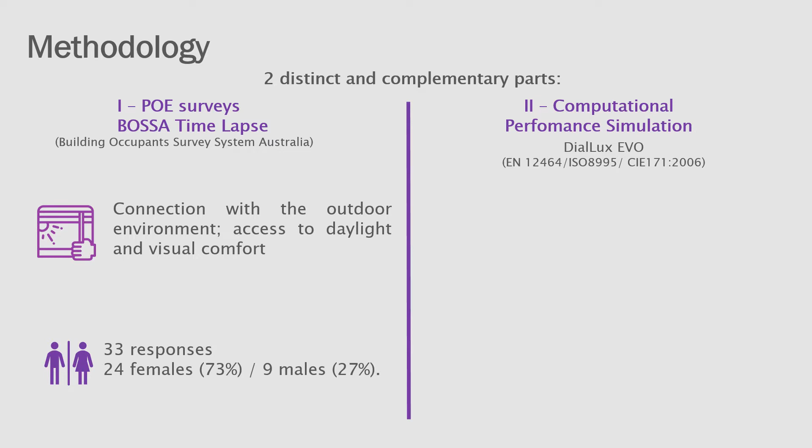This study has two distinct and complementary parts. First is the deployment of post-occupancy evaluation surveys to better understand occupant satisfaction using the Australian tool named BOSSA Time-Lapse. And second is the computational performance simulation using DIALux evo. For BOSSA Time-Lapse, results only from questions regarding the connection with the outdoor environment, access to daylight, and visual comfort are reported. BOSSA collected 33 responses from all workspaces analyzed.

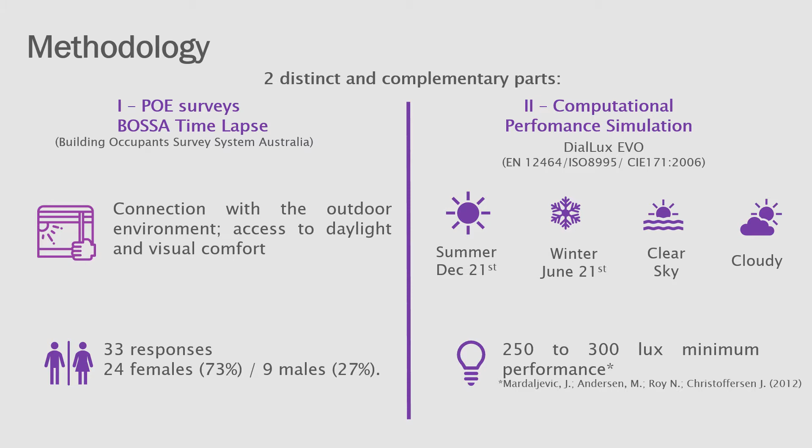Simulations were performed for summer and winter solstices. Clear and cloudy sky conditions were also considered. The range of 250 to 300 lux was used as the minimal performance criteria for lighting levels. FAU-USP was designed by the architects Vilanova Artigas and Carlos Cascaldi in the 60s. The Brazilian modern architecture had a remarkable development in the 20th century.

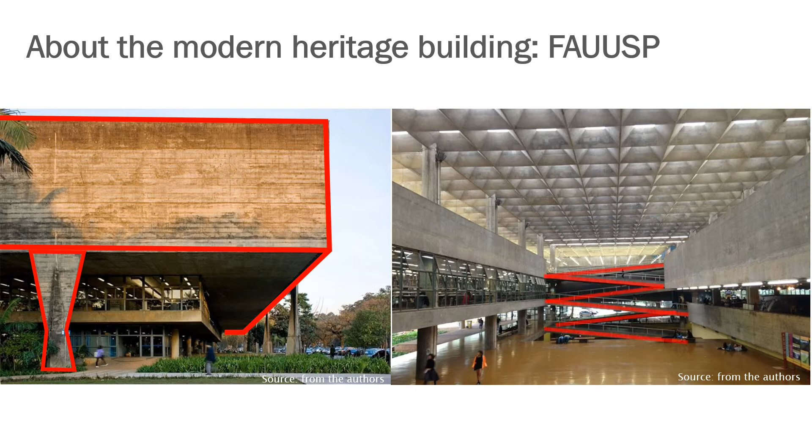As part of his practice and main concept, Artigas also implemented passive environmental strategies to his project. The use of floor-to-ceiling glass windows allowed the access to natural light and outside views, while an extended concrete slab works as a horizontal shading along 2 main facades, protecting indoor spaces from direct solar radiation.

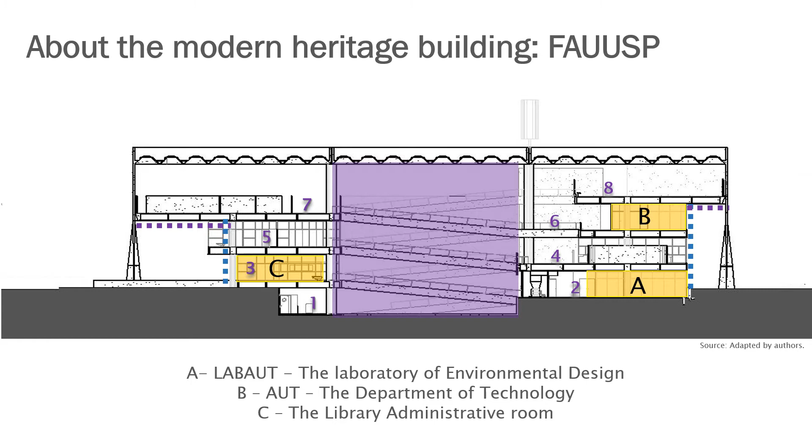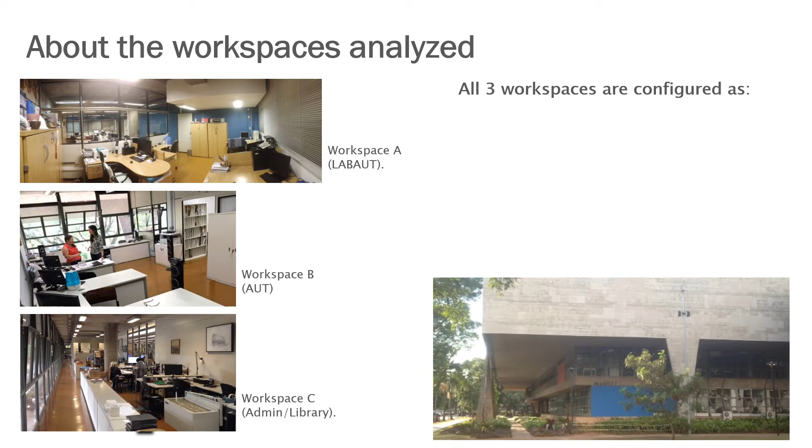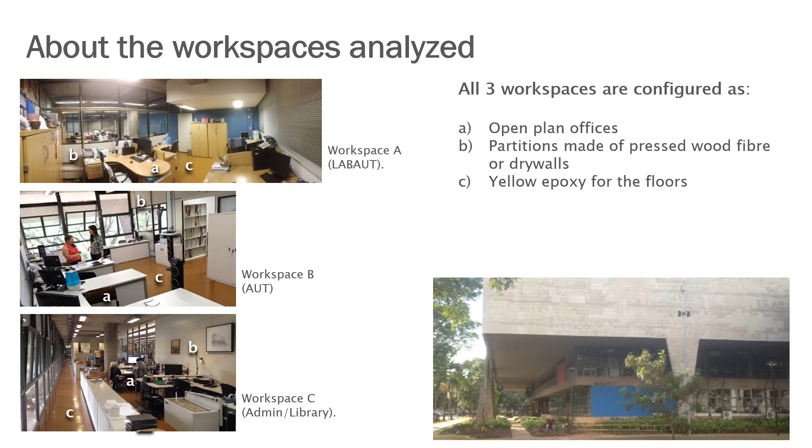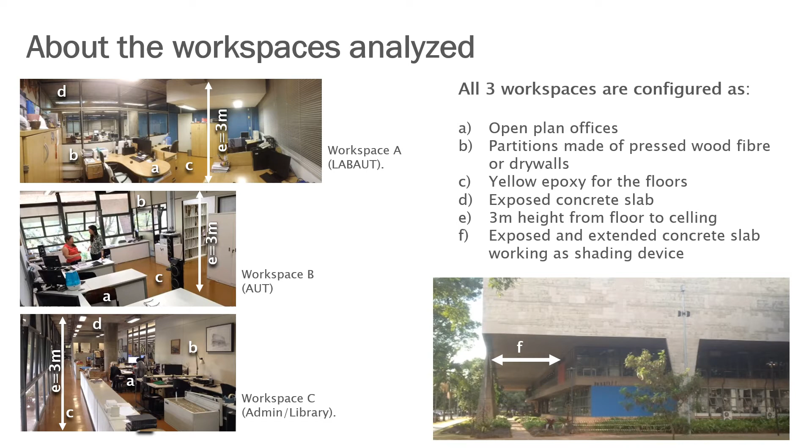The 3 yellow boxes highlight the workspaces analyzed for this study, named here as Workspace A, B, and C. The plans allow us to identify each workspace analyzed in different orientations and floors of the building. The 3 workspaces have similar configurations and are configured as open plan offices, partitions made of pressed wood fiber or dry walls, yellow epoxy for the floors, an exposed concrete slab, 3 meters height from floor to ceiling, and an exposed and extended concrete slab working as shading device. Both the exposed concrete slab and yellow epoxy flooring designed by Artigas are protected from any modification.

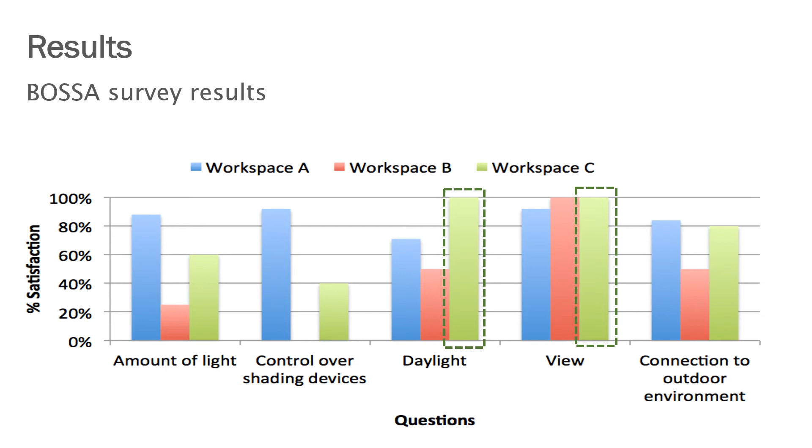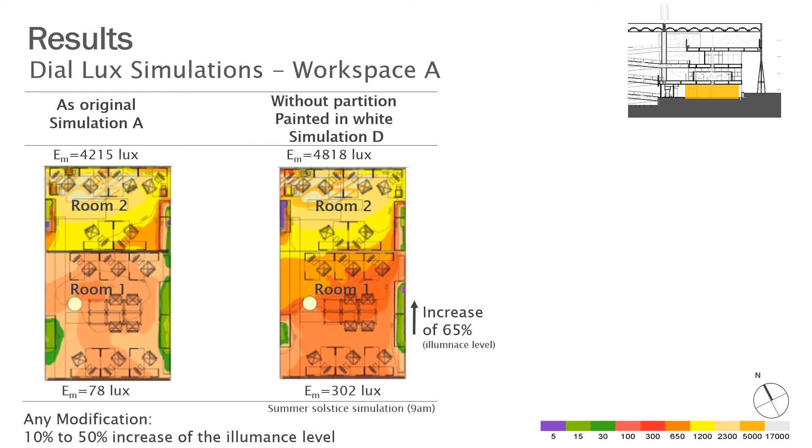These modifications increased illuminance levels by more than 3 times when compared to Simulation A, allowing further spaces from the window to achieve a minimum of 250 to 300 lux. For any modification proposed, it is possible to achieve an increase of 10 to 50% of the daylight illuminance level. Those results could address reported dissatisfaction regarding the room being too dim.

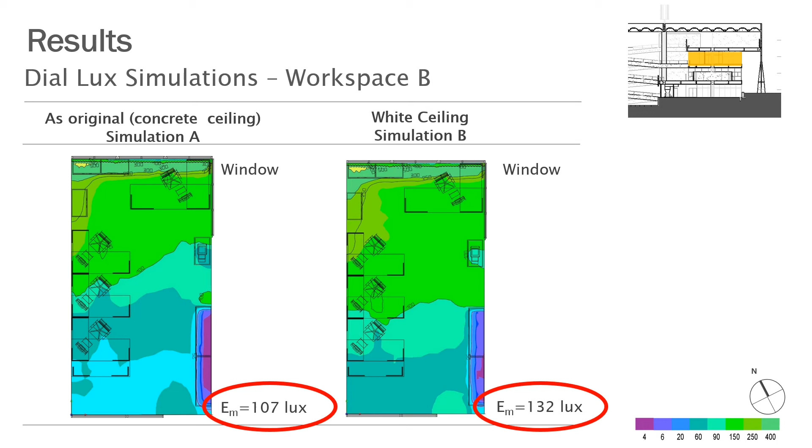For Workspace B, 2 simulations were carried out. The original configuration, named as Simulation A, and a second simulation, named Simulation B, where the concrete ceiling was painted in white color. None of the simulations achieved the minimum performance criteria of 250 to 300 lux. However, Simulation B showed an illuminance increase of 19%, reaching up to 150 lux in spaces furthest from the window.

In contrast, occupants reported dissatisfaction with too much glare from light, too bright environment, and reflection on screen. Both dissatisfaction results from surveys and performance simulation results might be related to the design aspects of the space, so a more detailed study should be carried out.

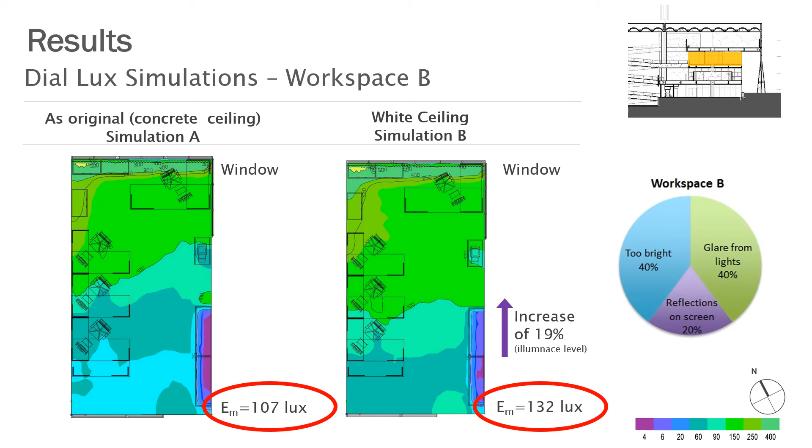Workspace C is the only office that achieved the minimum criterion for light distribution in its original design, probably because of its shallow configuration. In addition, when modifying the ceiling color, Workspace C exceeded the maximum performance criteria by up to 65 lux. In regards to the occupant survey, dissatisfaction was also linked to glare from lights, which can be related to the layout distribution and design aspects of the space.

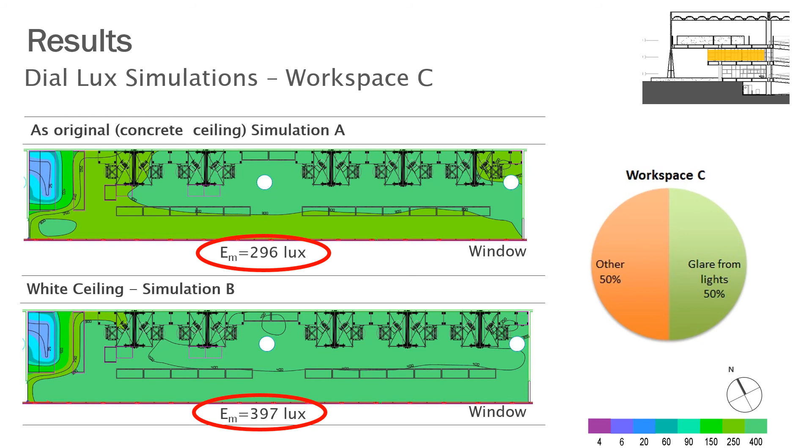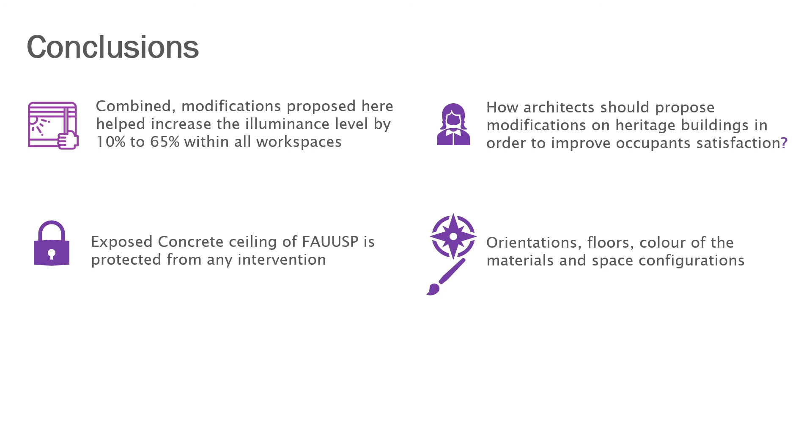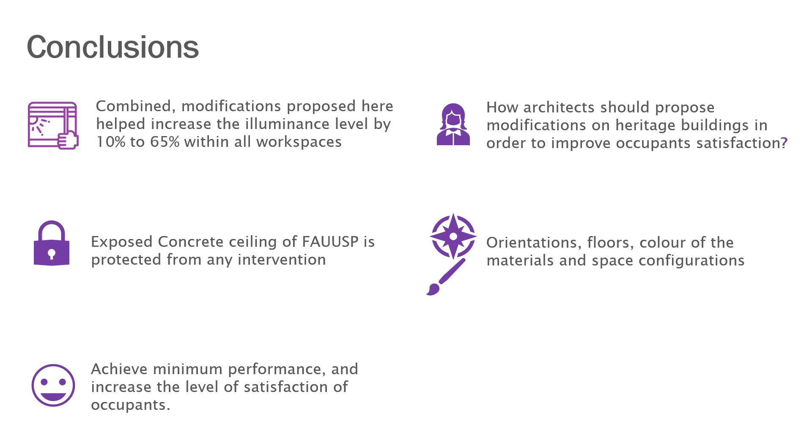Combined, modifications proposed here helped increase the illuminance level by 10 to 65% within all workspaces. These results bring out the discussion of how architects should propose modifications on heritage buildings in order to improve occupant satisfaction. The concrete ceiling of FAU-USP's building is protected from any modification because of the heritage-related restrictions reflecting the design of an era. However, the study showed that for specific orientations, floors, color of the materials, and space configurations, any modification within the workspace, such as painting the ceiling in white, is required to achieve minimum performance and increase the level of satisfaction of occupants.

Further studies should be conducted to address the limitations of the current study in terms of sample size and demographics.